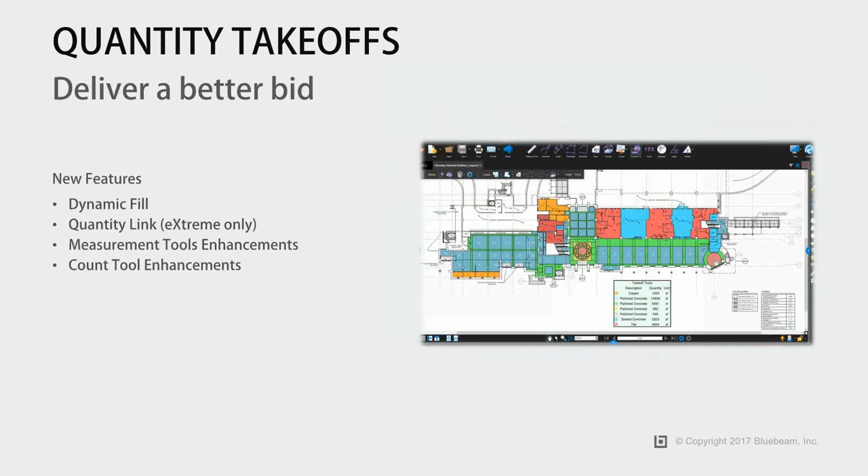As mentioned at the beginning, we've placed a lot of focus on takeoff workflows, as you saw in the new enhancements. Now let's look at other enhancements besides takeoffs we're introducing in Revu 2017. For automation, we'll introduce 2 of the most heavily requested features of all time to help customers such as yourselves: automation, form creation, and batch sign and seal.

These really help the customers get the job done faster. You'll see that on the demo. Next are the visualization tools. These tools will help customers communicate information better.

The 2 major new features in Revu 2017 are 360 photos. This feature allows users to take a 360 photo with cameras such as Samsung Gear 360 or Ricoh Theta S and embed them through capture into the PDF.

3D PDF enhancements - again, a feature your customers have been asking for. So without any further delay, let's just go straight into the demo.

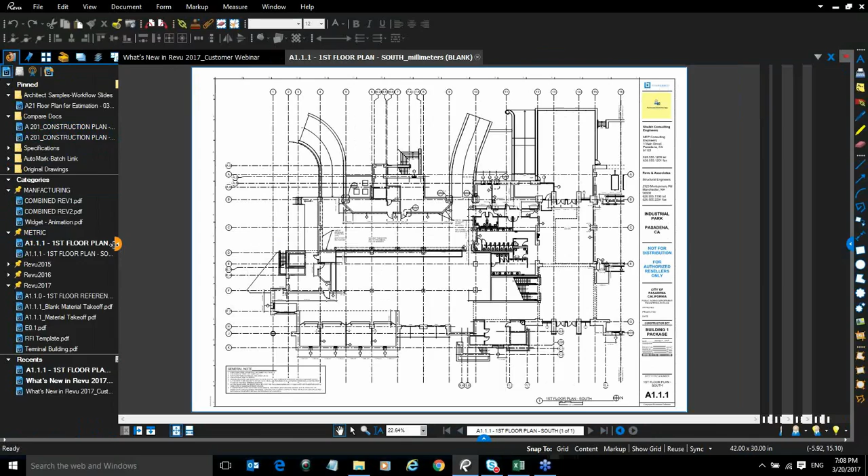Okay, so the first one is going to be the estimation, the takeoff estimation. Let's just go ahead and open a document. I have a document here. Okay, I'm going to open it up. And you can see it's a drawing, and then I have a little attachment over here.

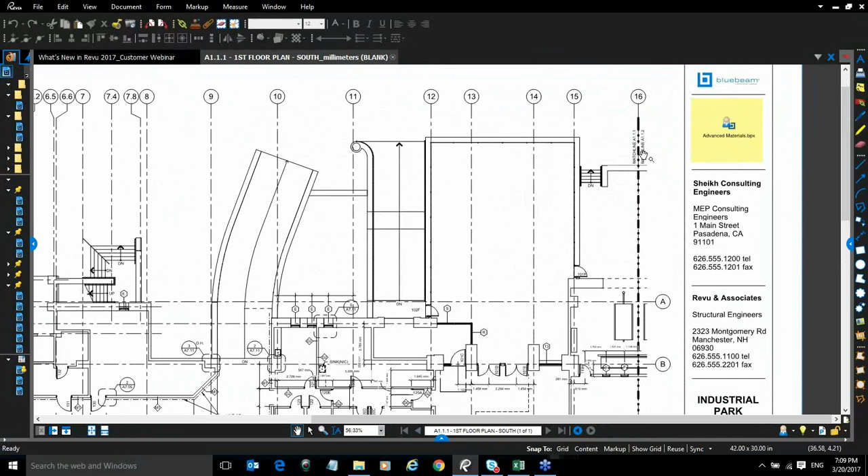So I'm just going to play a scenario of being an estimator. I'm receiving this document here, and it's good to have this profile that's attached here, an advanced material profile - this is a good way to communicate to the team. If you have a profile that you want the estimators to use, there are several ways to communicate that, but one of the best ways is to actually attach it to the document, like what you're seeing right here in this example.

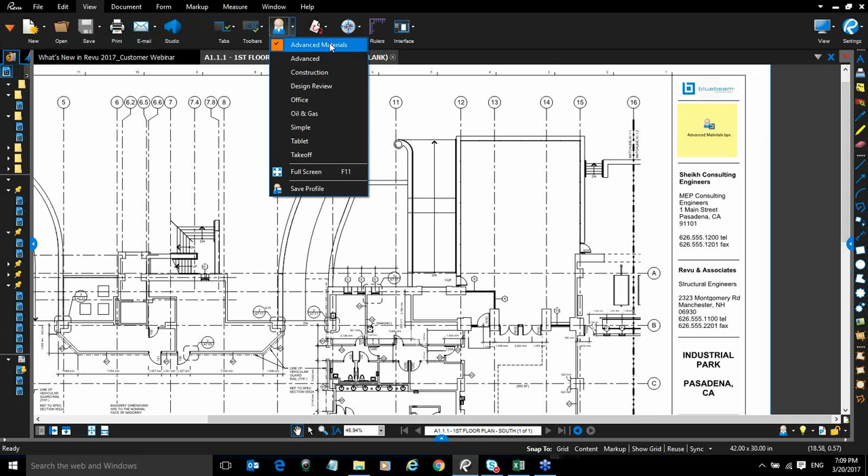All I have to do, if I'm an estimator receiving this document, is double click on this and it automatically loads in the profile. As a matter of fact, I've already done this, so I'll just show you how it looks. I have the profile here, and by double clicking this once again, I have this advanced materials loaded right here.

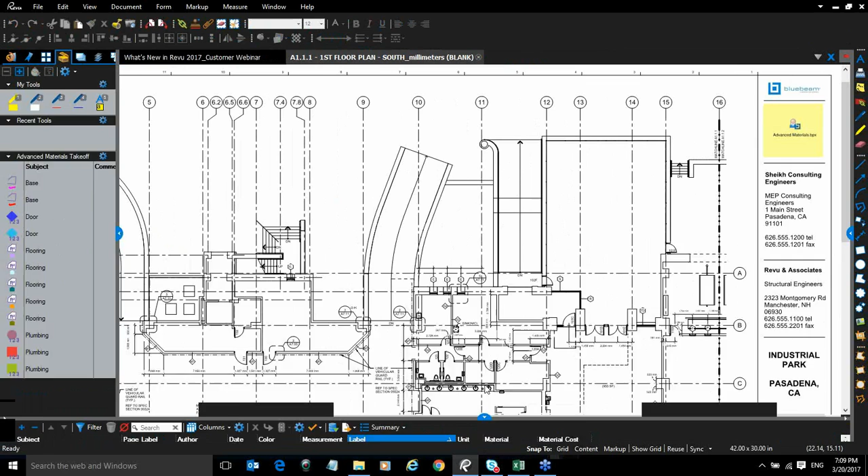So what do I have in this profile? First of all, this advanced materials includes these preset materials with these label settings and all the advanced materials - it's kind of ready to go with the setting right here. Also included in this profile - let me shorten this a little - are 2 custom columns. One is called material and the other is called material cost. These custom columns can be made straight within Revu from the section right here.

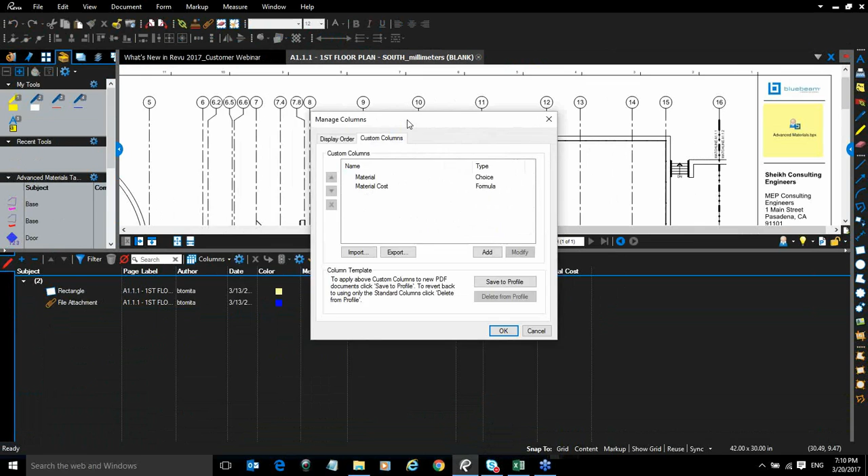I'm just going to open right here in this section, and you have the custom columns tab right here, and you'll see these 2 custom columns that were created. So let's look at each one. The first one is the material right here. As you can see, when you click on this, these are all preset - basically a combination of the material and the cost. This is in dollars, $5.50, whatever it is, all created here.

So one way to do it is to actually go one by one into this in detail and continue to enter all these items. But to be honest, that's not really intuitive enough, because usually the estimators will probably have a pre-built spreadsheet with all this information built in. So rather than spending time within Revu creating all these line items one by one, going all the way down, you can actually just import that spreadsheet straight in - load the pre-designed spreadsheet right here to save time, and you have the information that you need.

So that's the first custom column that you have. The second one is the material cost here. So let's just open and see how that looks like.

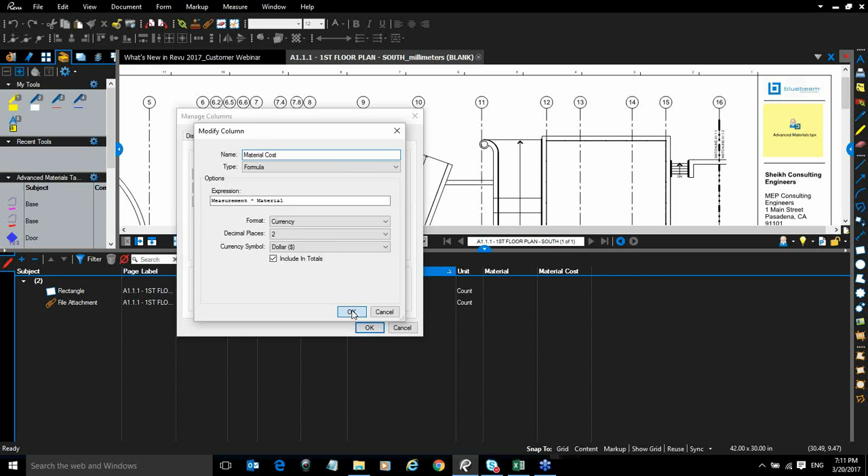This one you see is a formula type. What it does is takes the measurement that you've taken off from the diagram and multiplies it by the material cost that you just saw on the other custom columns in the material columns here, and it generates an estimate, subtotal of the estimate right there. So those are the two, the tool chest right there and the custom columns embedded in that custom profile or advanced material profile right there.

So now I have this information, I have this profile loaded. What's the next thing I do as an estimator? Well, before I start taking measurements, I want to make sure that I'm getting the correct measurements. So what that requires is a calibration, of course. Let's go ahead and do the calibration.

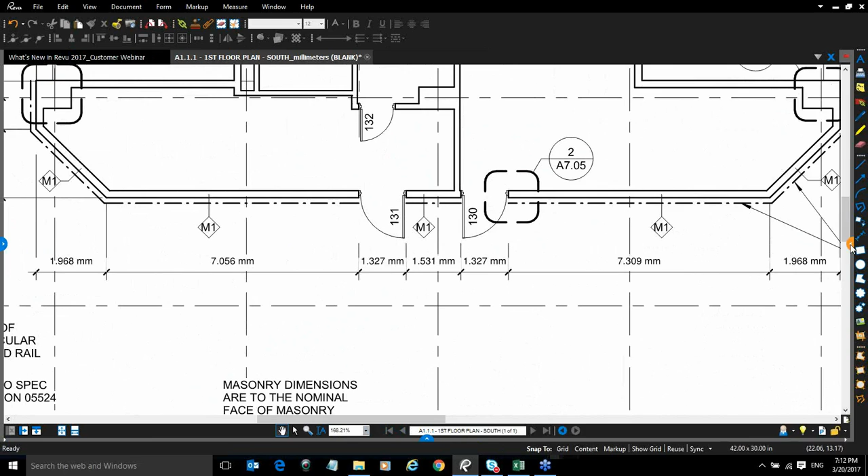Best practice is to take the longest area measurement or the longest length measurement and take the calibration from there. So I can go over here to my right panel, go to the measurement tab, and choose calibrate. I'm going to take this longest line over here.

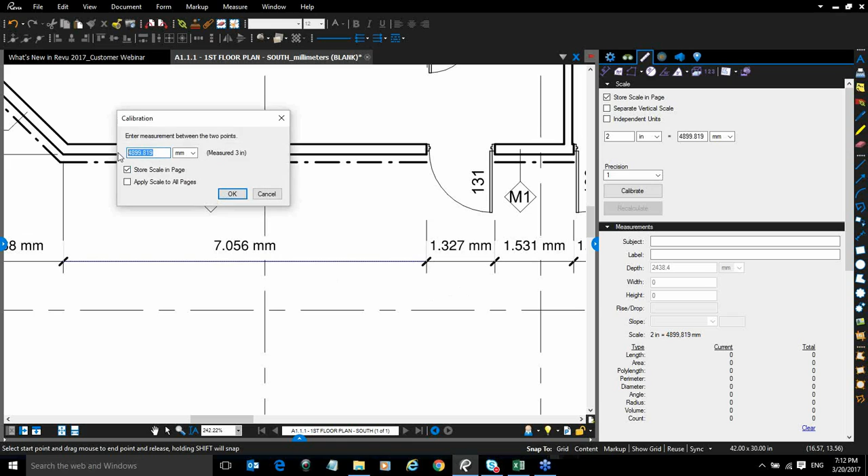And take the measurement here. Click, and I'm holding shift to draw a straight line right here, and I'm going to adjust this to what it shows. It's 7.056 millimeters. Okay, I'm going to click OK.

And once I have that takeoff, I want to make sure that it's the correct takeoff. So I'm just going to take the measurement on the second set right here to make sure that I have the correct calibration done. Oops.

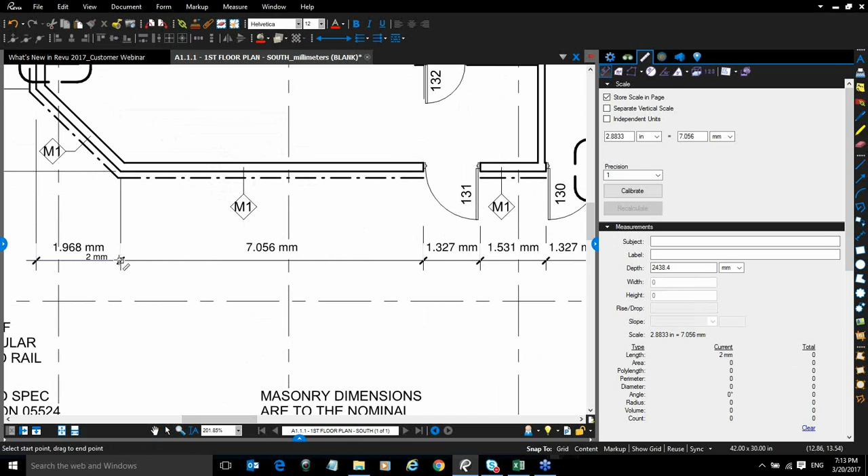Let me just go ahead and take that off. Accidentally clicked on the check. Okay, I'm going to delete that, and I'm going to take the measurement right here. And go right here, and I'm going to set the precision to 3 digits, and there you have it right there.

So now I have this. I'm going to make sure that it's correct. You can see that it's correct right here. It's a little bit off, but we'll live with it. That's fine. If you do it correctly, then it'll show the correct precision right there. I can do it again, but I don't want to waste too much time doing that for you guys.

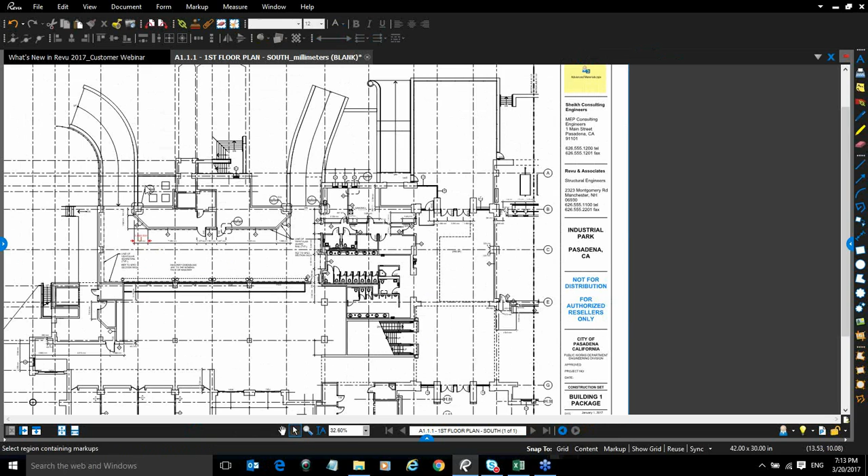So I have that over there. The next thing I want to do, this is something that, to have a quick summary as an estimator, is a convenient tool. It's strictly optional, but I want to do something called a legend. Some of you who are already familiar with Revu know legend is a functionality we introduced in Revu 2016. So that's a last year feature that we introduced, but it's a very convenient feature that I wanted to show you how it looks here.

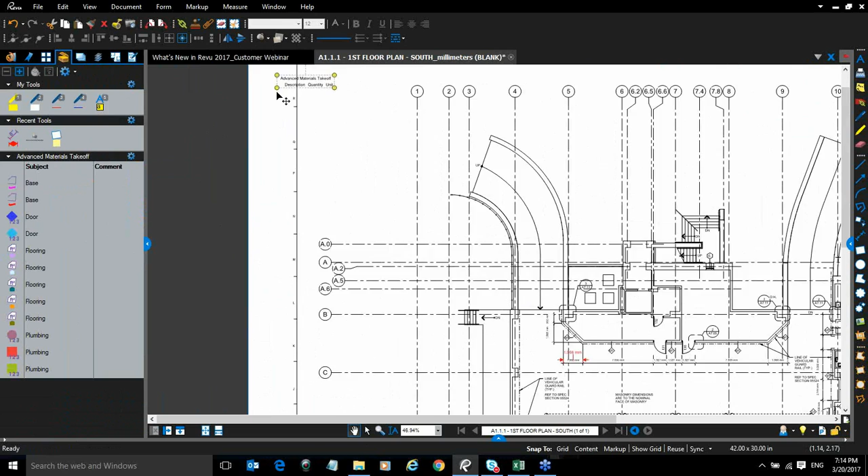So to get the legend, I click on this right here, go to properties, click legend, and create new legend. And as soon as I click that, it's already built and you can see it, and I can just paste it anywhere I want. I'm going to put it in the corner right here so it won't be too distracting. I'm just going to open it up right here.

And once I have this, okay, I'm going to change it. I'm going to add some more in here. I'm going to go to properties right here, which opens this tab, and I'm going to edit the columns right here. I'm going to add a couple more in here to make it easier to see.

I'm going to add label. Okay, I'm going to first add label, and I'm going to move this up. Okay, up over here, and I'm going to reposition it. You'll see it over here once I start doing this. I'm going to reposition it and put it right next to description. So I have the label, a label quantity, and I have a unit, and I want to add one more.

I want to add material cost. Okay, so let me go ahead and pick material cost right here, highlight it, and I'm going to move this up. And you'll see what I'm doing right here as I do this.

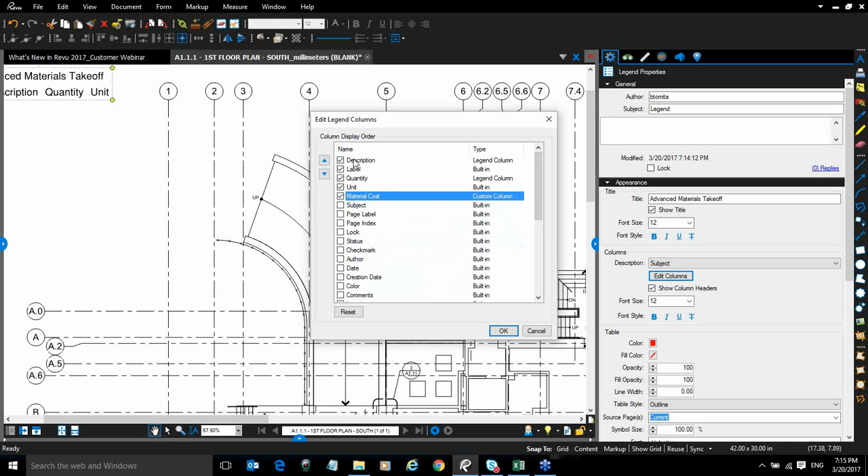Okay, so as I do this right here, I move it up here. So I have description, label, quantity, unit, material cost. I'm going to click OK. And once I click OK, you see that it's all listed over here.

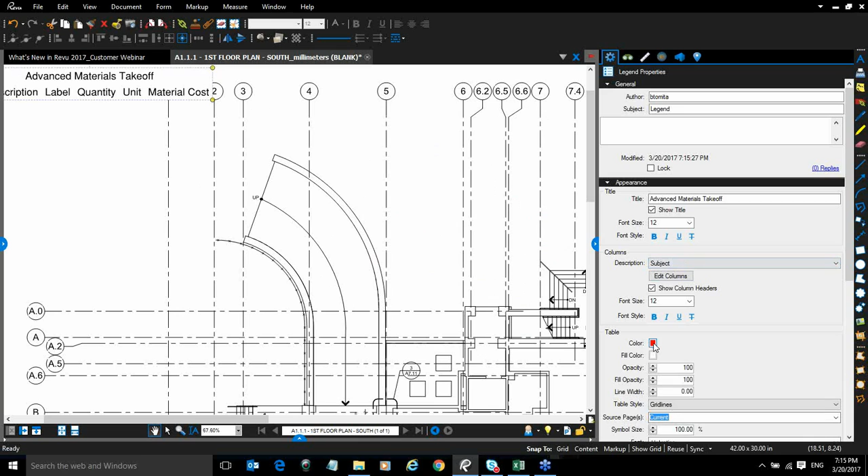Just to clean up a little bit on the view so it looks cleaner, once again this is optional. I don't want to spend too much time on a Revu 2016 feature here, but I'm just going to clean it up a little bit so it'll look nicer. I'm going to change the color to black. And there you have it right here. It looks kind of nice, right?

So I'm just going to put it right here where it's not going to be taking too much space over here. And as you can imagine, as I start taking measurements, you'll see this filling up over here. Okay, so now I got the calibration done, and I got the legend up. I'm ready to go and I'm going ahead and do a takeoff.

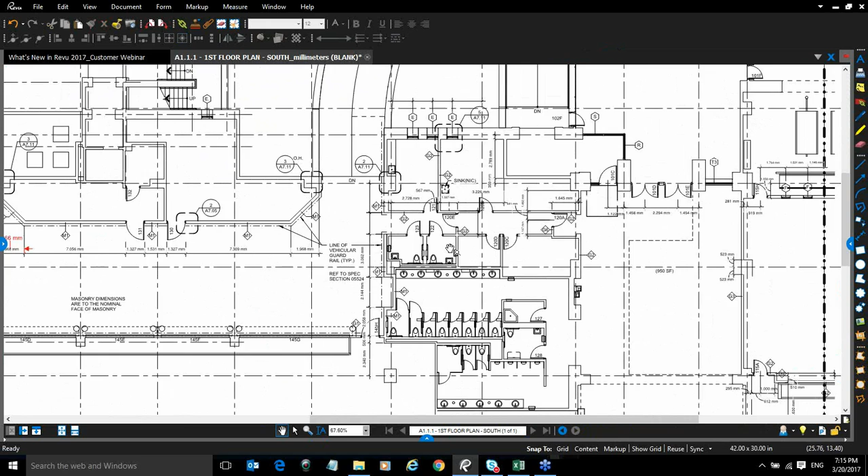First one I mentioned, it's a wow feature for Revu 2017, dynamic fill. Let me see how that looks like. Dynamic fill can be found in the measure right here, in the dynamic fill section right here. Once I click on this, you'll see a little panel open up right here, a little palette, if you will. First, I'm going to click on this little plus sign right here. This builds a boundary or wall, we call it.

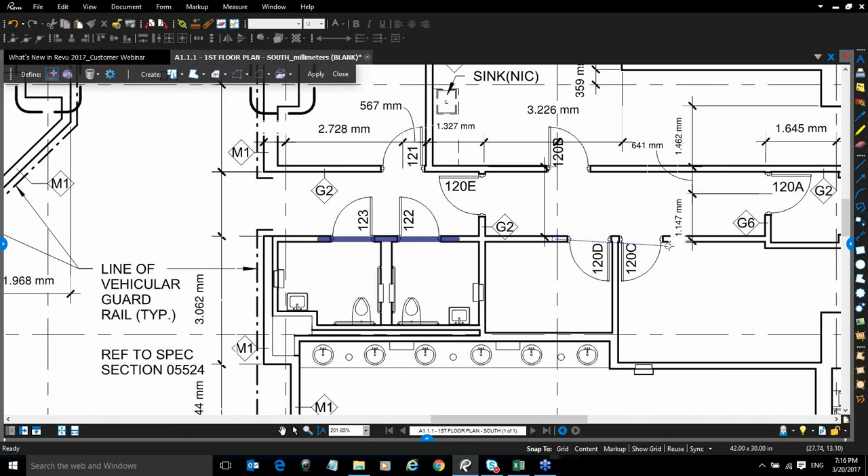And I'm just going to draw a wall over here. What I'm doing is I'm closing down all the open spaces right here. And you'll see the reason real quickly why I'm doing this. I'm just sealing all the openings right here. So I'm making an enclosure right here, right? Click and double click right here. So I build those boundaries.

Then I use the fill. So it's just like dropping a paint, and it just automatically fills like this. Just drop it, get it going, and it just fills it up. I'm just going to do one more to give you an idea.

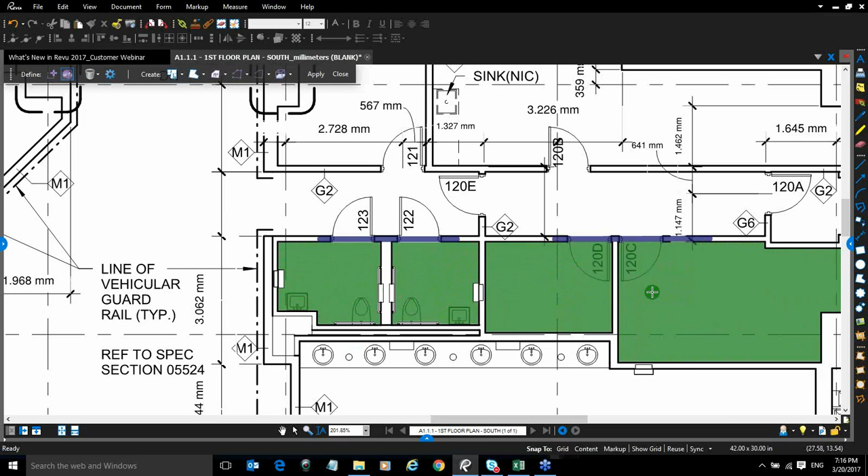So once I have this fill done, okay, then I'm already ready to make takeoffs, right? Let me do the takeoffs. I can do spaces, I can pretty much do anything I want. Let's go ahead and do the spaces right here. I can rename it if I wanted to. I can change the color, right? I'm just going to change it to purple for the sake of it, right?

And I can do polygon, but then I can do area measure. I'm just going to take the area measurement right here, and not just taking area measurement, but if you remember on my advanced material profiles, I already have labels or materials onto it. So I'm just going to go ahead and pick something. I'm going to say flooring is concrete in this case right here. So I'm going to pick this one and click on that one.

And I can add some more variety. I'm just going to add a perimeter to this. I'm just going to say tile base, add it right here, take that off. I can also do volume and all that type of stuff as well. I'm going to go ahead and apply.

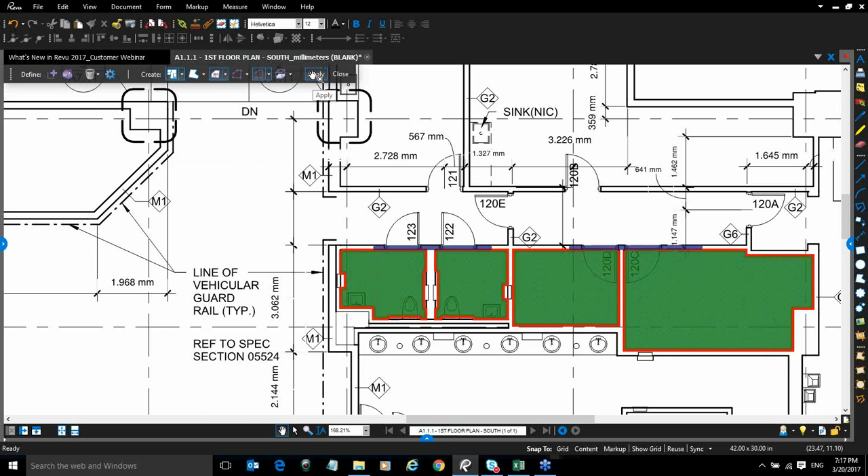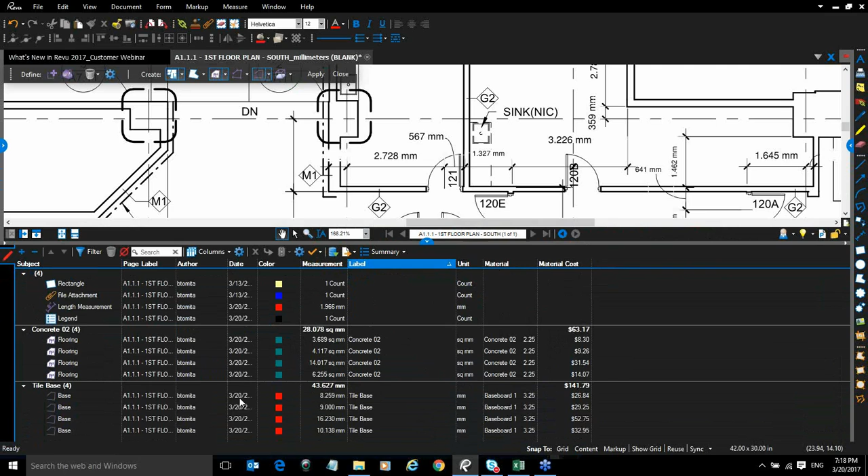As soon as I finish apply, you will see that the measurements are all taken. And not only that, if you remember I did the custom columns, the material, assigned the material and the corresponding cost to it. It just automatically does the calculations based on the formula, and gives you the estimate in a matter of seconds. I did the area measure takeoffs, and the perimeter takeoffs, and it's all showing right here, immediately. Okay, let's just see what happened here on the other section.

If you remember, I took spaces also. So I have the spaces taken right here too. In case the customers are working on something like Revit, a CAD program, then we have a functionality or option to convert Revit rooms into spaces. But then for some reason that didn't convert over, so you have to create your own space, or you prefer to create your own space.

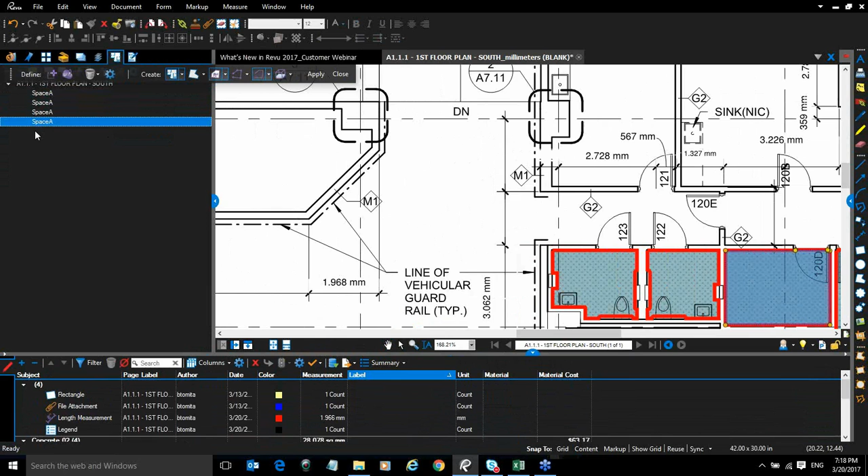You can still create spaces the old-fashioned way, one at a time, but this method is much quicker, as you can see right here. You also have the option to rename them. I just named all of them Space A for now, but you can name them anything you want. This is a much quicker process than the traditional way, and it saves a lot of time, which leads to saving money for the customer. It's the biggest wow feature for Revu 2017.

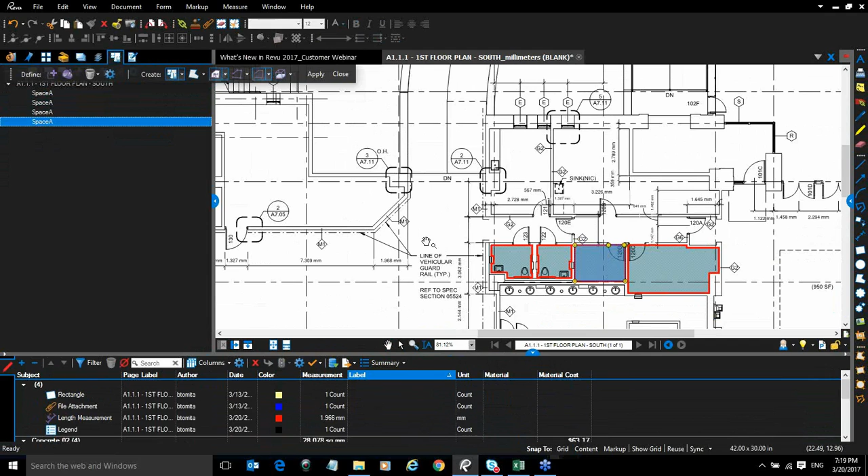In addition to performing these standard takeoffs, Revu 2017 also has tools specific to different workflows, making it much easier for different trades to complete their tasks. One of them is called the Polylength tool. Let's see how that one looks.

I'm going to take a sink right here. I have the sinks, and let's say there's a pipe running through it, because it's a sink. I want to figure out the measurement between each of these sinks, as well as the overall length of the pipe that I'm going to need.

That can be accomplished with the new feature called Polylength. Go to Measurement, and it's Polylength right here. I click on this one, then all I have to do is take the sink and click in between. I'm clicking to start and clicking between the sinks, and you can see it's starting to take measurements already.

When I get to the last one, all I do is double click on it, and it automatically calculates the measurement. It gives you the in-between measurements—sorry, it's a little hard to see—but you see the measurements and the overall measurement as well.

Since it's a sink, I have to think about a pipe that's going to run down to the floor, let's say about 10 millimeters down. In the older versions of Revu, like 2016, users had to be creative because that functionality wasn't available.

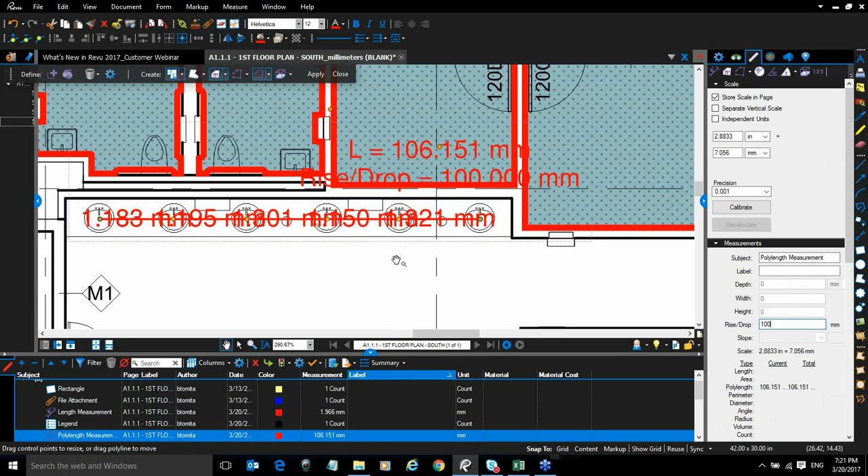Let me do this again quickly—I'll put it to zero, and it goes back here. I'll put a bigger number so it's easier to see. You can see it added 100, and it shows that 100 is the rise drop value right here. So that can now be calculated and indicated on the drawing with Revu 2017.

Another one here—I'm going to look at this ramp and take a measurement of this area. Since I have the dynamic fill now, I'm going to take advantage of that again. I don't have to build a boundary because everything is sealed, there's no opening here, so I can just go ahead and start pouring the fill.

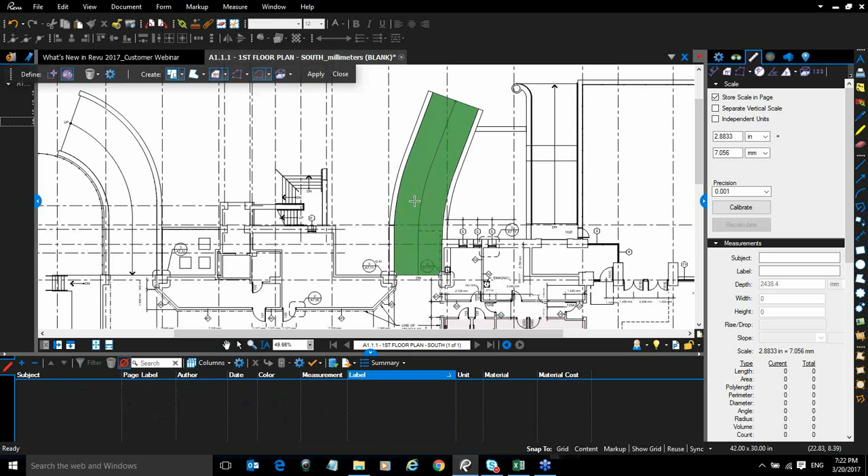I'll let it fill, and you can see it's all filling up and stopping right here. Once I'm done with that, I'm going to assign the same material, change it to 1 if I wanted to, and apply. As you can see, it automatically applied the material and calculated the area measurement right here.

Again, with the new Revu 2017 feature, you have the ability to add a rise and drop right here, okay.

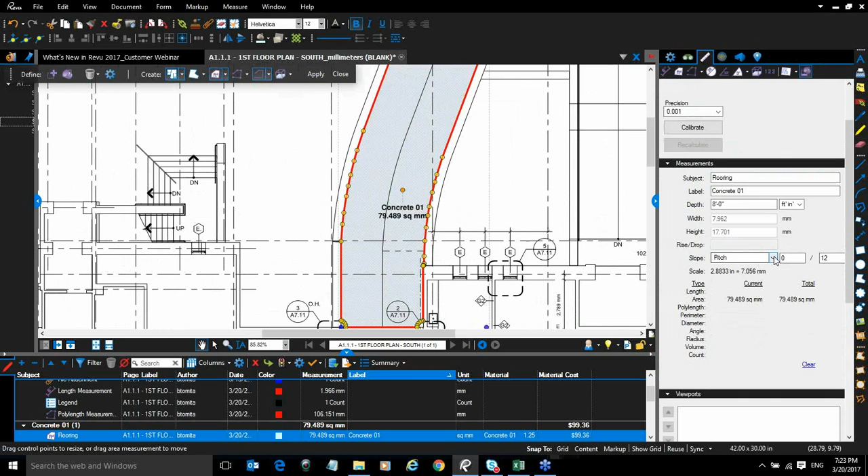So the rise and drop right here. Let's recap this rise and drop, that it can be slanted, it can be angled, right? Again, that was something users had to be creative with in the older version of Revu, and they had to do their own calculations and add some more measurements in there, and come up with their own version that they can add on to the square footage or area measurement.

But with this new Revu 2017, that can be indicated. Depending on which country you're located in, that can be expressed as either degree, grade, pitch, and what have you. So let's say I'm going to go with degree in this example. I'll say the slope is 15 degrees, and I'll add that and enter it. You can see immediately it recalculates the whole area measurement, and it indicates the slope of the degrees I've entered in this scenario.

I'm just going to go ahead and add zero again, just go back and do it real quick for you. Okay, so you have this right here, you have that indicator as well.

As far as cutouts are concerned, now you have the ability to do a cutout. Let me show you a cutout right here. The new one is the ellipse, so we have the ability to do a cutout by ellipse now. That's a new feature in Revu 2017 as well. As I'm adding all these cutouts, you can see it's adjusting the area measurement because it's taking that cutout into consideration, taking that out of the total area measurement. So that's a new feature for Revu 2017 too.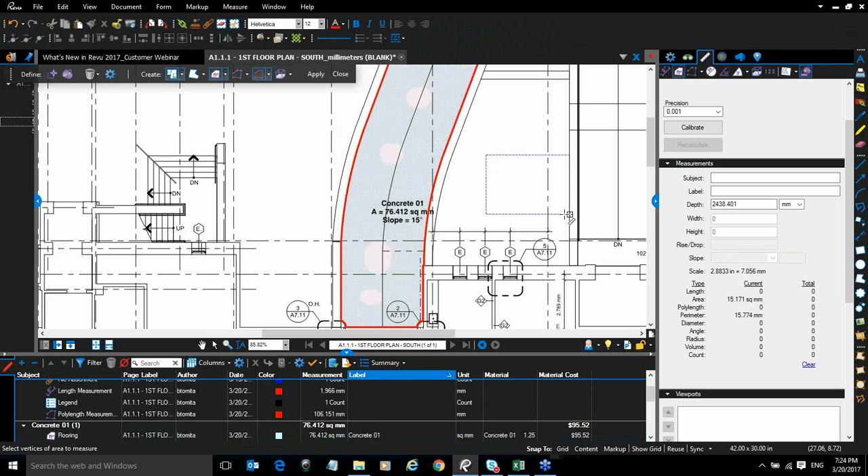Another quick one is that when you want to enter an area, let's say I'm going to enter an area just anywhere I want. I'm just going to add a rectangle right here. I have an option to actually display all the segment values right here. Immediately you can see all the segment values can be quickly displayed with this little option. Just click on that and you can indicate that. That's something a little new as well.

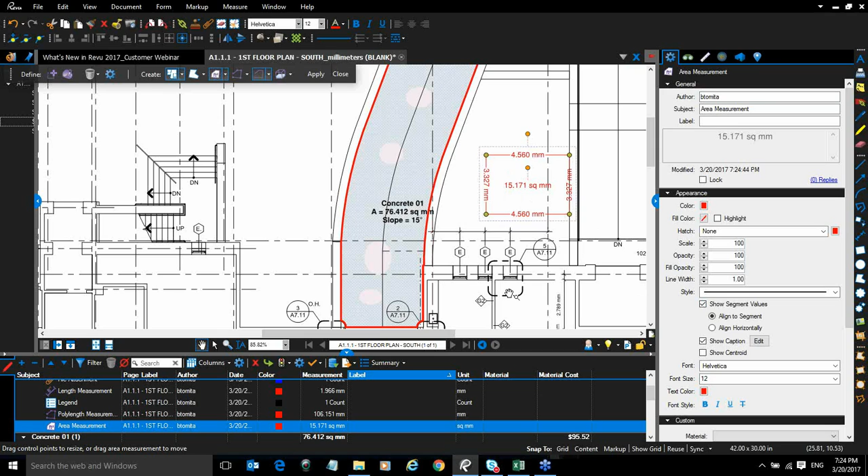Now let's talk a little bit about the count tool measurements, right? For the count tool measurements, we're introducing two types that you can count. The first one, let me just show you. I'm going to look at another sink right here. Okay, right here, and obviously I'm counting, so I'm going to try to count this - how many of these sinks are there on these drawings, right?

First, what I want to do is take a rectangle. I'm going to go over here and get the rectangle. This is for those of you who are familiar with Revu already, how it operates - you just take a rectangle, it recognizes that. I'm going to go ahead and search against that, it's a visual search, right? I'm basically searching against that shape, and it's calculating right now, and it just found 11 results right away. So there's 11 of these.

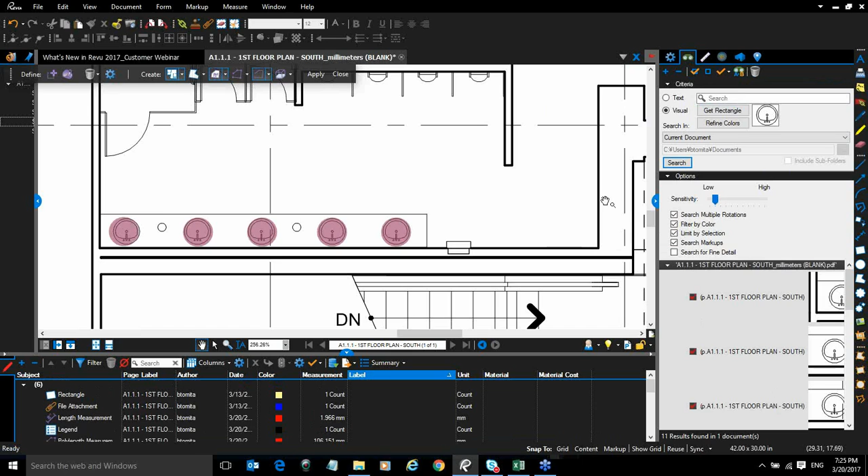What I can do is highlight them all because I'm counting them, right? And I can click on this check mark right here, and from my profile, I can assign the material right away from here. So I'm going to go ahead and select this one right here, okay? And it highlighted everything with that material. I'm going to click on that, and as you can see, it counted 11. Once again, it applied all the material costs and gave me a subtotal on the estimation for those sinks, all 11 of them, real quickly right there.

Not just counting, but it's also giving me an estimate right there on the fly, right? I can right click on this one, and I can actually do it on the drawing too, and I can also split them all. If I split them all, instead of clustering it all in 11 counts - which is still there - I can even divide them up into ones. I can split them partially, like if there's 11, I can do it like 6 and 5, or 4 and 7, or I can just split them all into one.

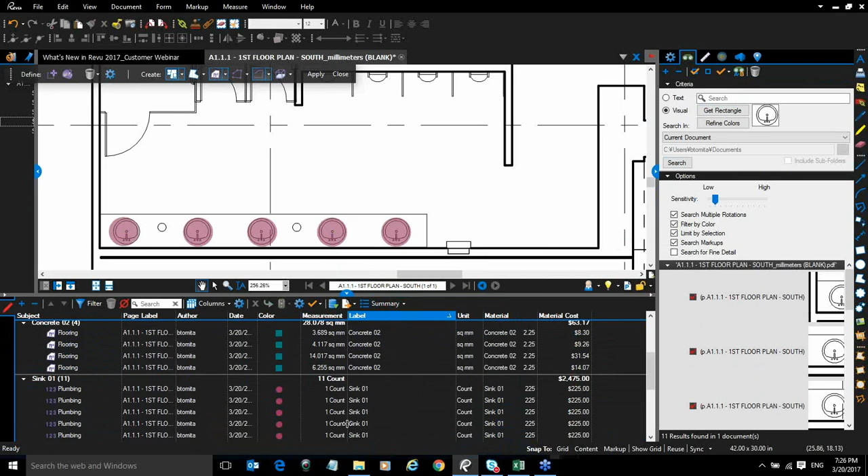So I can do split partial, or I can do split them all. So there's that option as well.

Another feature we're introducing is that you can actually use these icons or these images right here and apply that as a counting tool. So let's see how that works. Rather than explaining, let me just show you how that works.

So I want to take this design right here, and I want to use this. I want to make this into a counting tool. There's one way to do it, put check marks, like in the traditional way in Revu, it was all check marks when you're counting. But there's another option to do that in terms of using this design right here.

So what I'm going to do is I want to take this image and make a copy. In Revu, copy paste can be done by using a feature called snapshot. So I'm going to click on the snapshot, and I'm going to take this image right here. Okay, and this is a copy that I did. So obviously I'm going to go ahead and paste that. Now I have this image right here.

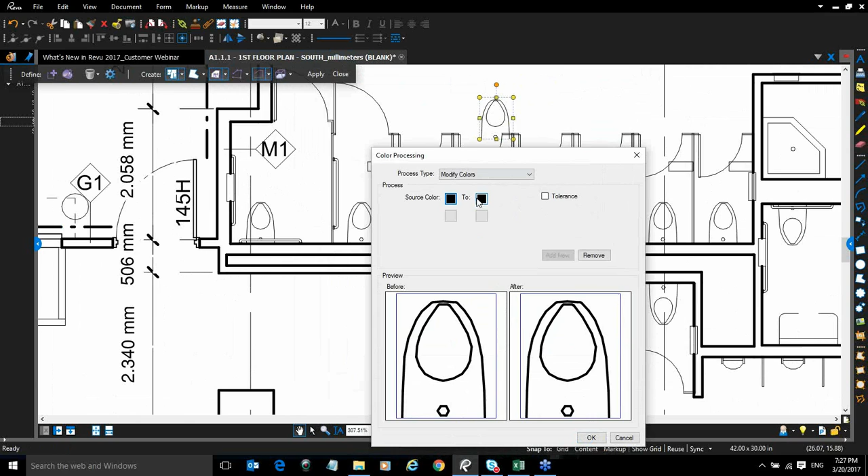To distinguish it, I'm going to change the color right here. The way it works, this is a black background, so I'm going to choose black background here, and I'm going to change this to a different color. Feel like a lime color, if you will. Go ahead and click OK. So now I have this changed color right here, and I have it highlighted.

Now with that, just a little recap, all the markups that's entered is being tracked, and it's tracked right here, the one I just created right here. I can just move this that I created into this materials takeoff section right here. So now I have the copy right here as a snapshot.

I'm going to right click on it, and I'm going to say create count. As soon as I do that, you see the same image built right here, and now it becomes a count measurement. You can see that it has a 1, 2, 3 indicator here showing that it's counting. It's a count measurement now.

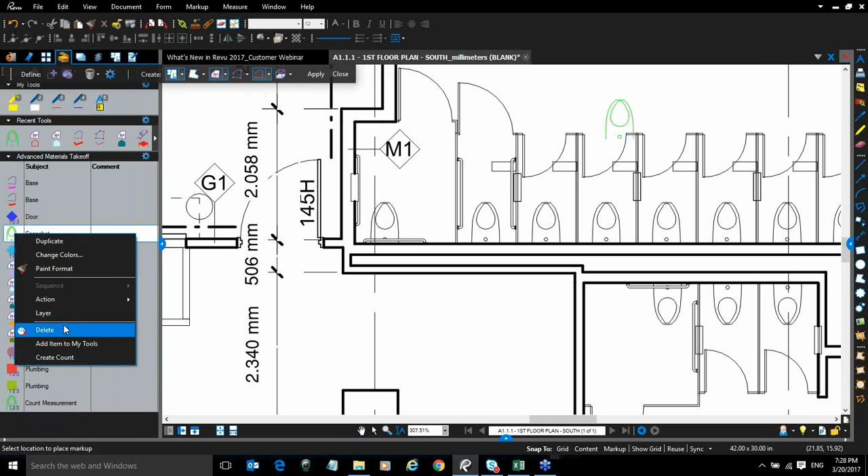So I use that icon for the count measurement. I don't need this anymore. I can leave it here if I want, but I don't need it anymore. So I'm going to go ahead and delete that. Once I create this count measurement, I can just go ahead and use that as a count measurement.

So I have these designs right here. I'm going to look at the markup list, see where it is. And you can see I clicked on 6 and I have it right here. It's all counted right here. So that's another enhancement that we made.

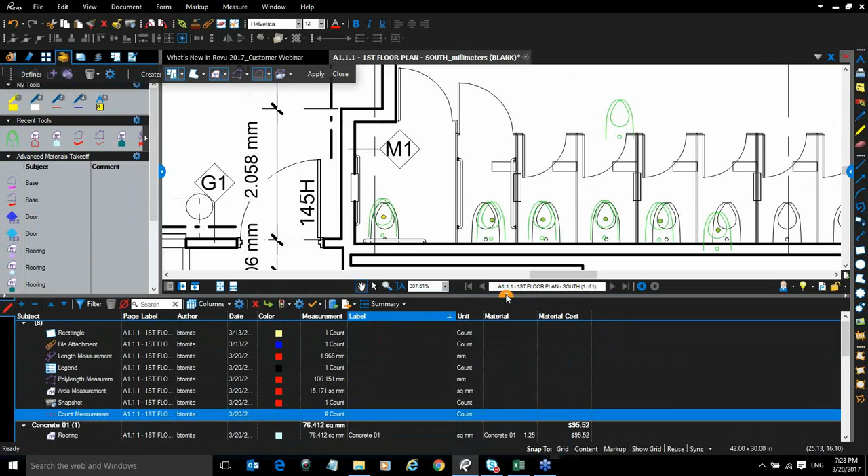You can actually use those images to make it into a count tool. Now you can see that I have all the measurement taken in here I need. Of course, in real world, if I'm an estimator, I'm going to have to do a whole bunch of them, but in this demo, I've done what I needed to do. I have all the takeoffs done. And if you remember the legend, I'm going to be showing you real quickly later, but then I have all the measurement summary over here, which is aligned with what's in here.

Basically, it's taking a summary of what's listed over here, and it's showing you a nice little summary right here. As an example, the tile base right here, you should see a tile base, quantity, and the material cost right here is showing right there. So now I have this nice setup. I have all the takeoffs done, I have a markup list, and I have a nice legend, a summary showing up on the screen.

But then the most important part for the estimators, the ones doing all the work within Revu, now they need a way to figure out how to extract this data, how to pull this data out of Revu to be able to put it on their estimation documents that they're going to use for bidding and all that. That's the most important thing to do.

So traditionally, what all the estimators have been doing when using Revu is getting all the estimates, the takeoffs, and then creating a report out of it, typically a CSV summary. They can use XML if they want, but then they export it out and figure out a way to put it into their estimation document, like an Excel spreadsheet.

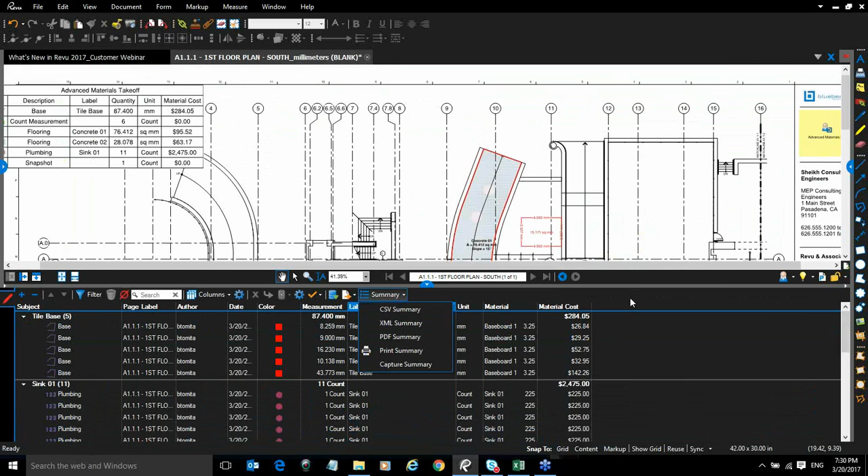Now with Revu 2017, we made that process much more intuitive. That's called the quantity link, and that's the next big wow feature for Revu 2017.

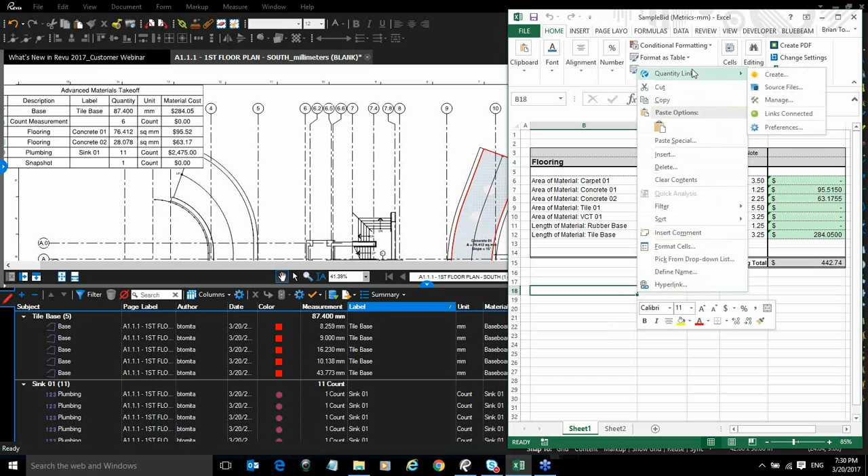So the way it works is I have this nice estimation sheet right here, and I have the documents open. The first step is I right click on my mouse and go to quantity link, and I have to check my source file. I'm going to find a document that's linked right here. I'll click OK, and as soon as I do this, you can see that numbers are starting to build right here.

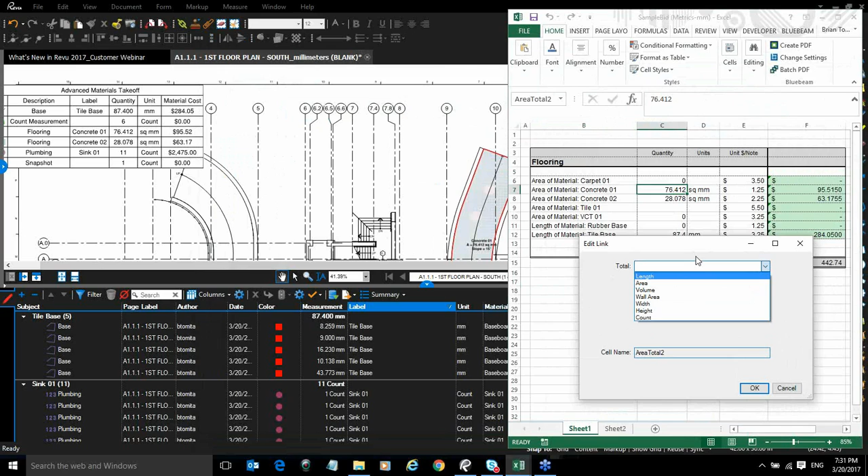The way this works is I click on the quantity in this little column, then go to quantity link and do edit. This one is showing area, so from here I can choose area. If it's showing length, I'll choose length, or any other unit I'm taking off of. In this case it's an area, and I'm going to choose a label. It says concrete 1, so I'll do concrete 1. So that's how that's being drawn, and you do this one by each column to get all the values.

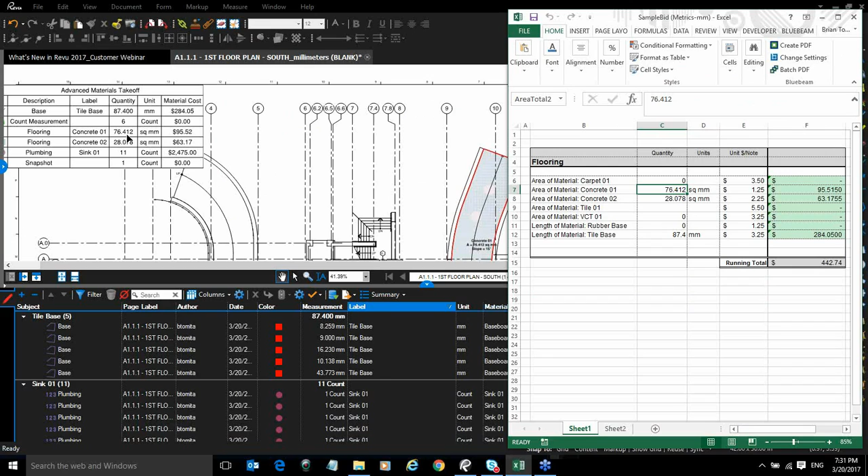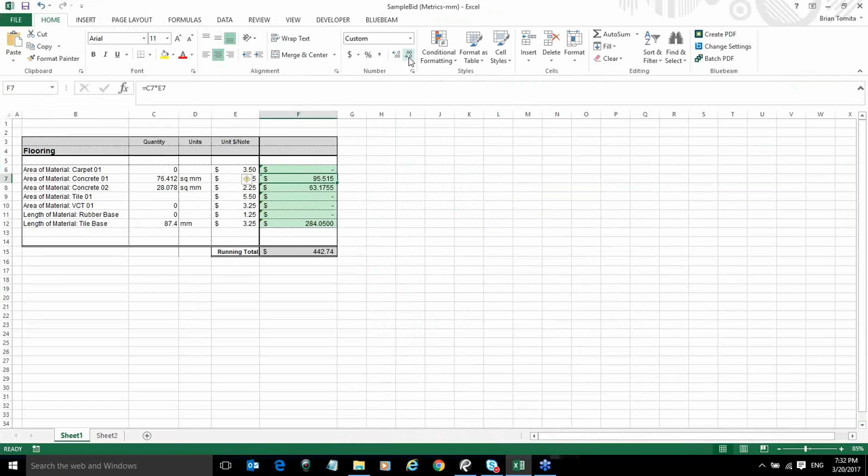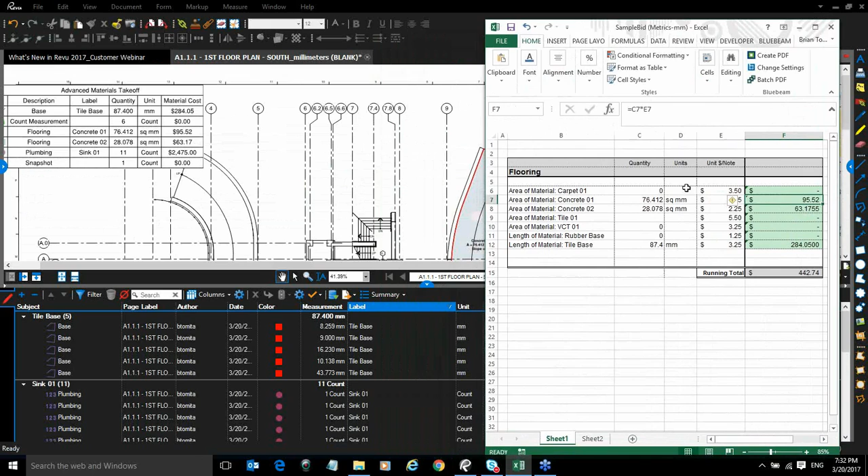So let's see if it matches. I have a concrete 01 here, the quantity is 76. The number is a little off, showing decimals that aren't two digits - it's 95.52, so if I shrink the decimals, it's going to show 95.52. I'll go ahead and take some decimals off so it's easier to see. So it matches on the numbers right there. And concrete 02 is 28.078 and 63.17 - same thing right there. So now you can see that it's linked.

So instead of going through that process of generating a report, exporting it as a CSV, and then figuring out a way to link that extracted information into this spreadsheet, now it's all linked right here.

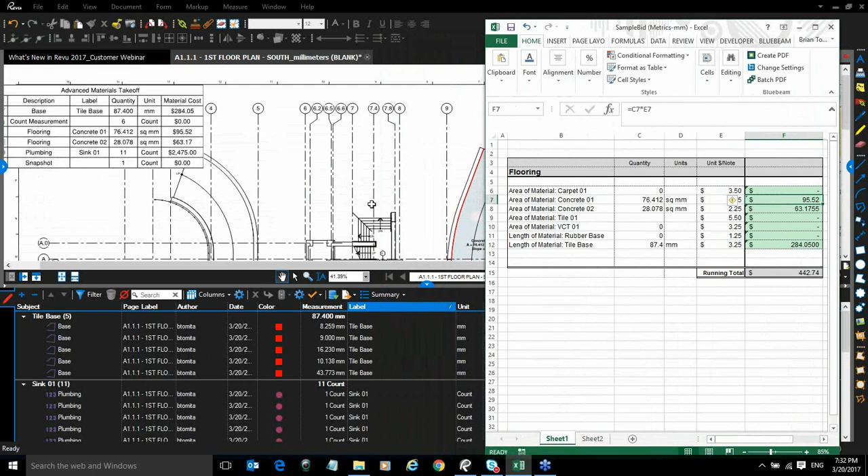Let me show you something interesting. I'm going to go to the material and choose the concrete again right here, and add this. As you can see, when I add this, the legend is dynamic - it changes the value right here. Watch more carefully, one more time. I'm going to delete this - it shows the quantity value change over here and over here. Now I'll add concrete 02 back right here, and the numbers have been updated right here.

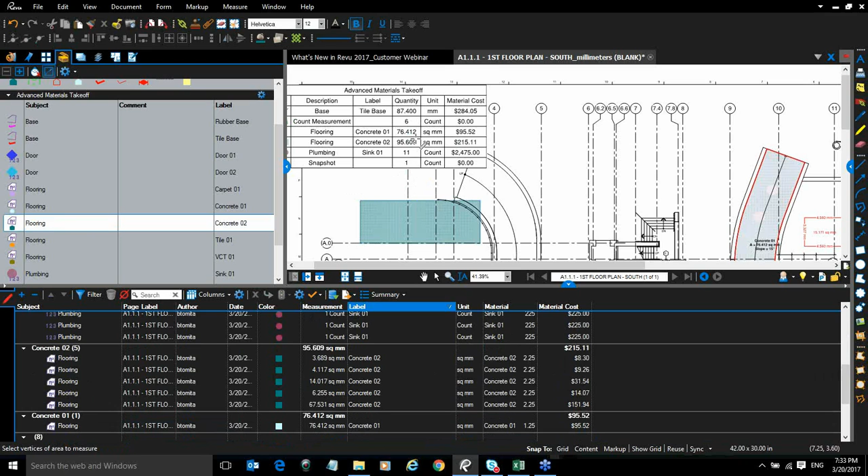So what I'm trying to say is that this link is dynamic - it's a dynamically connected link. So when you change the information on the drawing, it will reflect and update the spreadsheet. Right now it's one-way traffic, so drawing updates get reflected into Excel or the spreadsheet, but if you update anything on the spreadsheet, it will not come back onto the drawing. So it's one-way, but dynamically linked, okay?

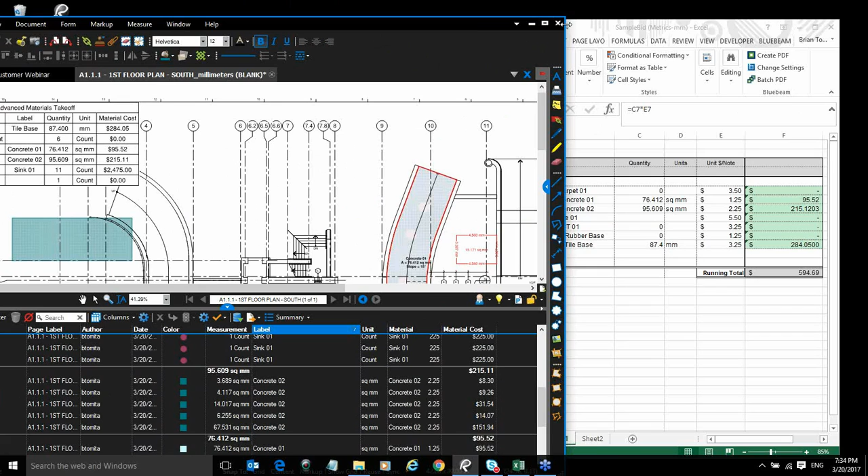Let me do something here. I'm just trying to adjust it so that it'll be a nice size right here. Okay, here we go.

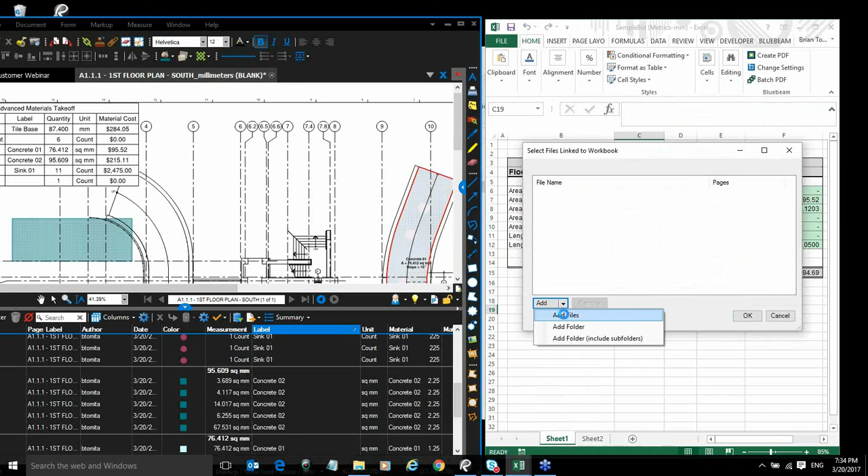So let me go ahead, as I mentioned, I was linking this to this spreadsheet. I'm going to pick on this empty cell right here, go to quantity link again, go to the source file, and take this link out. I'm going to remove that link and try to add something else, a different link right here.

I'm going to click OK. Once I do this, you see that it gets a lot busier and you have more information here. If you remember, I added, once again, I go to quantity link right now. Source file is showing as this filled document right here. So let me go ahead and open it and see how that looks.

Once I open that document, you will see right here, this one right here, that it's a lot more. You can see a lot of takeoffs have been done on this document. And if you look at this as an example, tile base, right? Tile base right here. Let me see. Yep, let me see right here, the tile base.

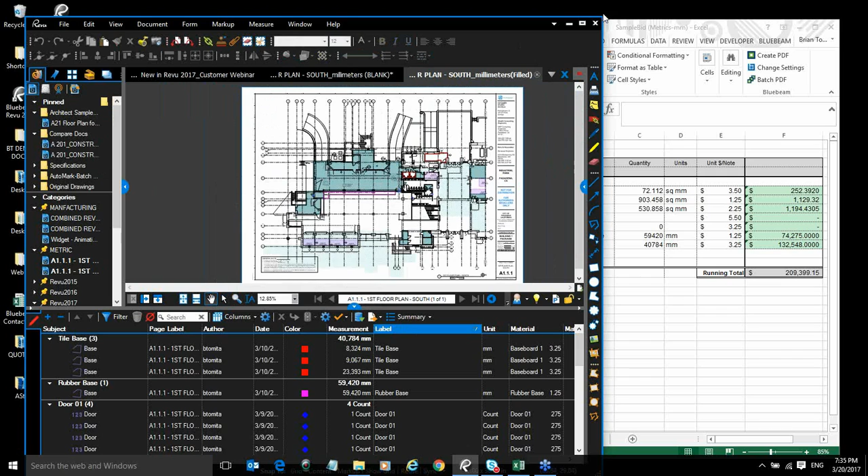If I look at the tile base right here, what's the total amount? 40784, tile base 40784, and the value is that much, 132. Let me see if I can extract that, let's see if I can show it to you. There you go. And you can see that the amount is showing right here, right? So you can see that the link is still working.

So what I'm trying to get to here is that you don't have to, every time you change your drawing, the link that you do onto a different drawing, recreate the links again one by one each of them like I was showing you. No. Once you establish a link, it will continue to work even though you switch between drawings. So it's a much quicker process to extract the data from Revu into your estimation document. A big time saver, very powerful document, powerful functionalities for Revu 2017.

Okay. Now, those are all the automation, or the workflow new functionalities that we've built into Revu 2017 for takeoffs and estimates. Right now, let's look at other automation tools.

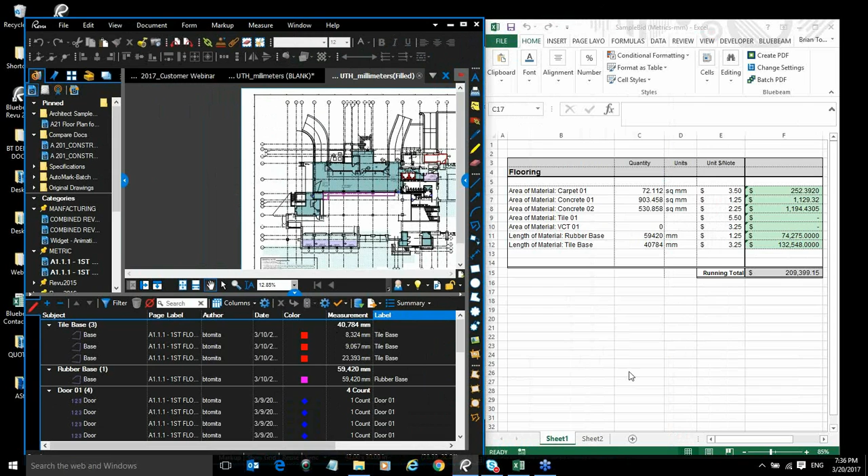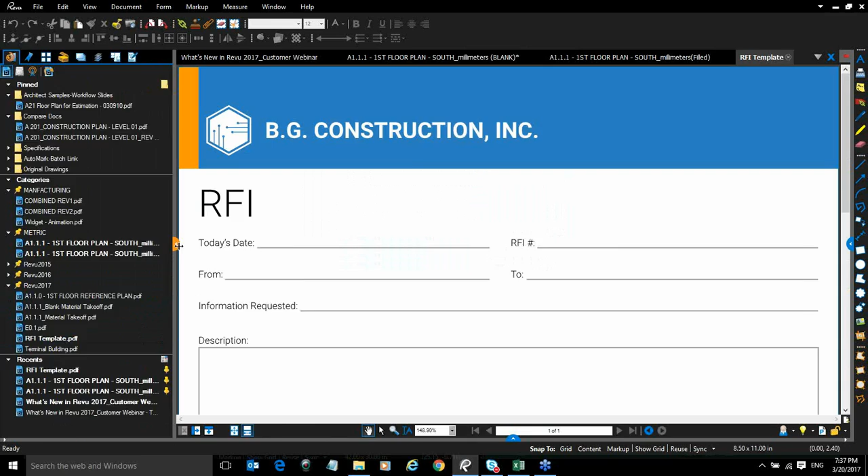The first one is the automatic form fill. Okay, so how does that work? Let me just go ahead and open up a form. All right, go ahead and open up a form, let me see here. RFI template right here. So I have this nice RFI template here, and I created this, right? A template right here. I don't have to really explain too much of this one.

I go to the document, let me see here, form, I'm sorry, form. And there's this new feature called auto create, right? So go to form, auto create, and click on that. Boom, it just creates the form just like that.

And nicely, it even captured the signature section right here, so you have all these categories right here that's being created. Those of you who are familiar with forms creation, PDF form creation, traditionally this had to be created one by one. Now, as you can see, in a matter of seconds, everything is created. So everything is automated. This was actually one of the biggest, one of the highest, highly requested features of all time, to have this automated. And now we are finally introducing it with the release of Revu 2017.

Right, the next one is batch, sign, and seal. How does that work? So I'm going to go to File, and I'm going to go to Batch, and I'm going to go ahead and do a sign and seal. This is a new feature added right here.

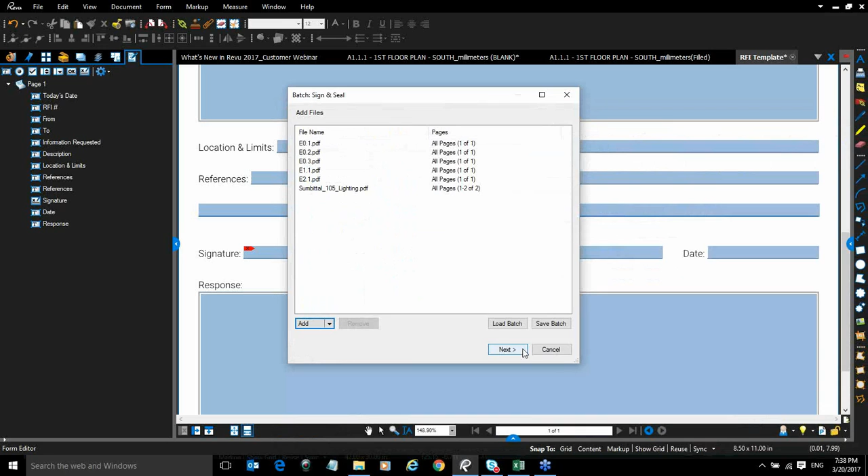Go ahead and double click on that one, and I'm going to add all the files that I want to add on that one. So I'm going to go ahead and choose my sample documents here. Okay, batch and sign and seal, and I got all the documents here. I'm going to choose everything and click Open. Next, and once I load all that information up, then I'm going to see those documents with the menus over here.

There's a signature here, sign and seal, right? So the first one is to do a signature. The assumption is that by the time you get at this stage, you already have your digital signature account. In this case, as an example, I'm going to use mine.

Digital signature, I have my own, and I'm going to enter my password to access it. Once I have this, it's listed right here. For those familiar with digital signatures, I have an option to add this. I reviewed this document, and I can add a date if I wanted, and I have this nice and ready to go signature right here. Let me load it up a little bit.

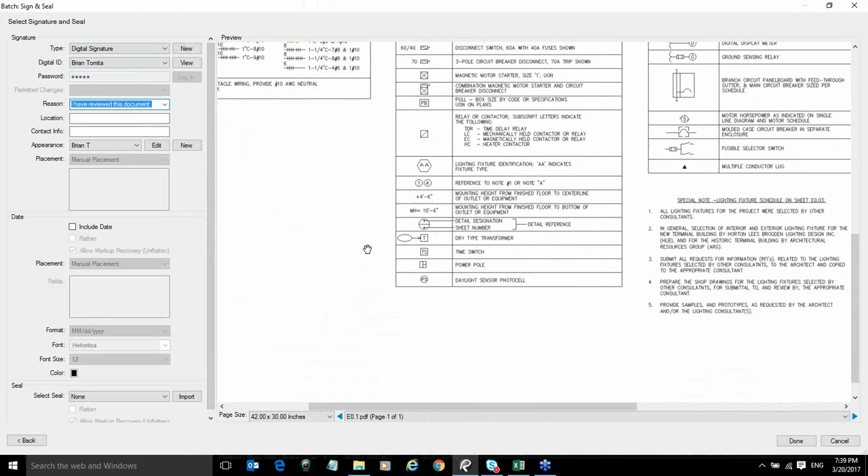Once I have the signature, I want to position it into the document. So I'm going to resize it a little bit because I want to position it in a nice area here, make it a little smaller. Move it over here, enlarging it, or made it even smaller. There you go, and I'm going to put it right here. I want my signature to come right here.

Same thing with the seal too. First, if you don't have anything, you can import a custom designed seal for the company, or use a sample one. I happen to have a sample one, so as soon as I click on that, you're seeing it right here already. I can go ahead and resize this again. It's just a matter of resizing it because I want to put it in the right position and move it into position right here.

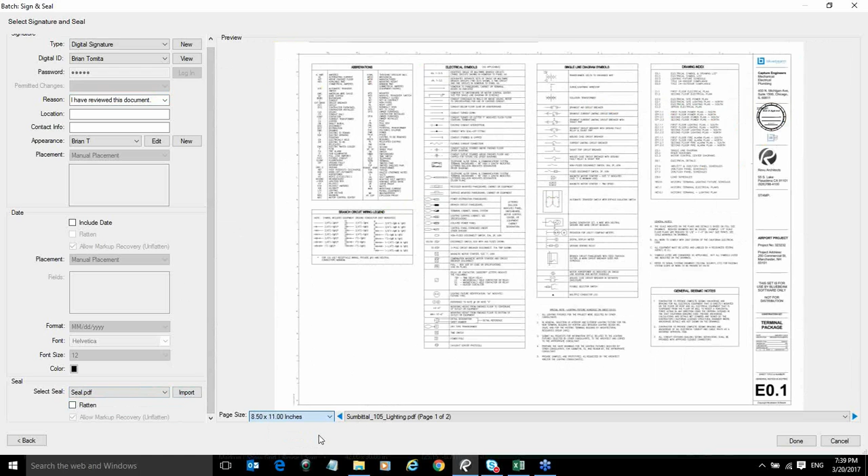I have that template, and let's look at a different size. I have it already right here. I'm just going to change it a little bit, or maybe keep it the way it is. It's too big, I'm going to make it look nicer for the sake of it. Okay, there you go, and I have my signature right here. I'm just going to put it somewhere like this. Once I go through all that in the design, I'm just going to go ahead and click done.

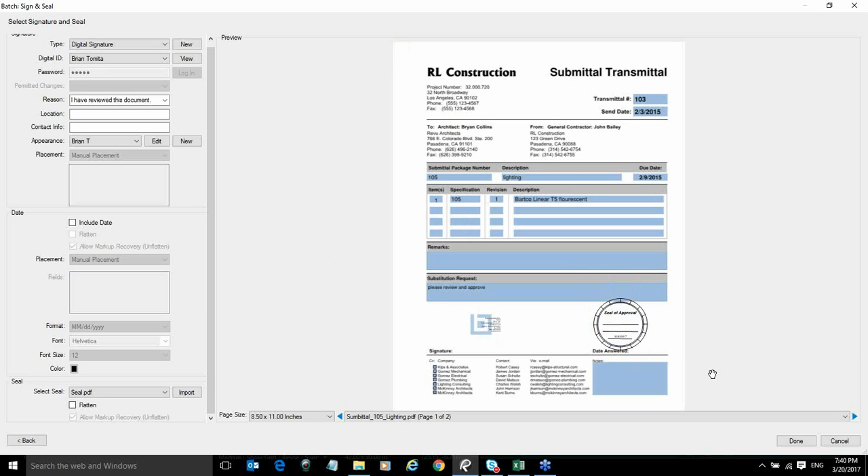Revu calculates immediately right there, and it basically puts them all in. Let's see how it looks like. It's nice and done, right here. I just put it right here. It's kind of ugly, but I did it right there.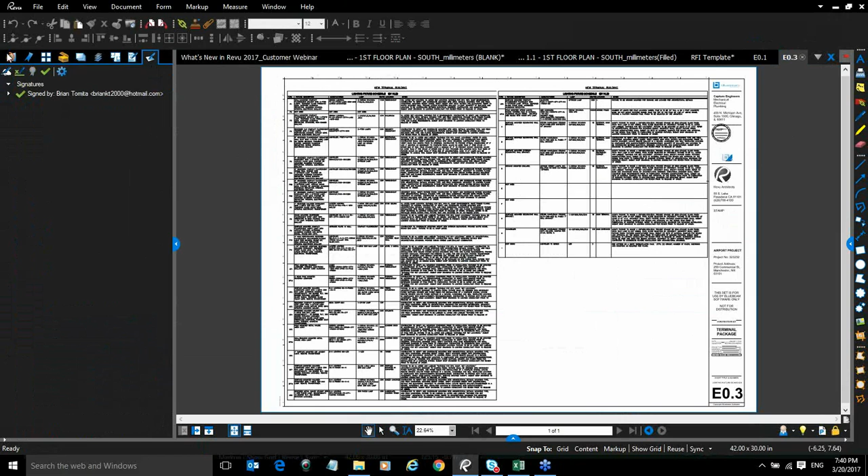Let me see how the other ones look like, I'm going to open a couple more. Yep, this one has it right here. That little warning is telling you that there's a signature, and it wants to open a different signature box right there - that's what it's basically telling you, but it's nicely done over here. Let me just open one more with a different design to show you an idea. Okay, and this one is showing it right here as I intended.

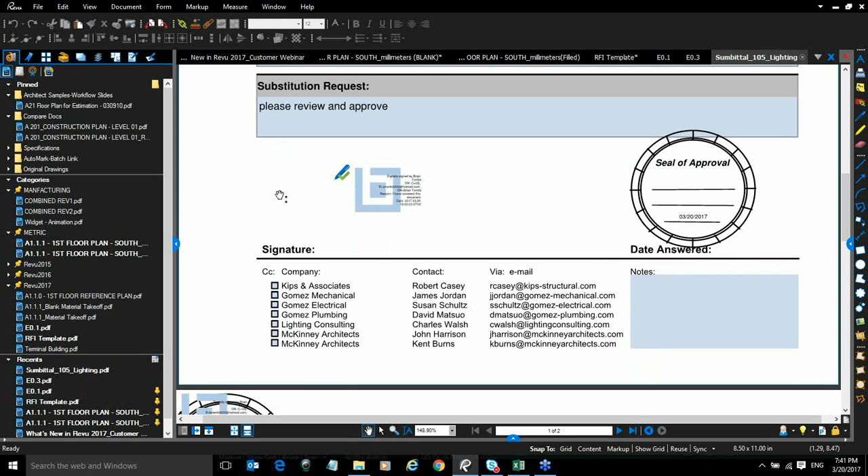As you can imagine, by the time you do the estimation, this requirement for these documents to have sign and seals entered can amount to anywhere from the hundreds to thousands, right? 500, what have you, thousands, what have you. So this batch process, once again, will help the customer save substantial amount of time and money by having this done automatically in this batch process.

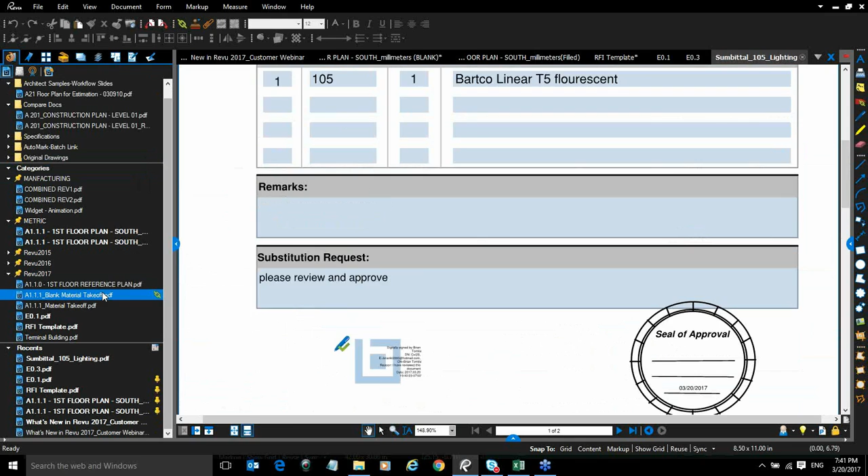Okay, now next is the visualization tool. Let's look at the photo, okay, photo enhancement. So I'm going to open this one, this drawing right here this time. And if you look at this drawing, I'm just going to close this off to give you more space.

You'll see that there's a capture that's attached. The capture, just a little recap, is a collage of photos, basically photos and video clips that you can add into a markup. So you enter a markup, which is this one right here, and you can actually right click and add this capture right here.

The advantage of capture is that instead of lining up, say you have 50 photos you want to list, you could do it one by one and list them all over here, but then you're wasting your precious real estate space. That's why we created something called a capture, so you can collect that information and put it all in here.

In this enhancement, I'll talk about the 360-degree photo enhancement. As you can see, this one is a 360 photo, indicated right here, and you can move it around. You can see it's a 360 image, and you can actually zoom in and zoom out, all the way out, and move around just like what a 360 photo image would do.

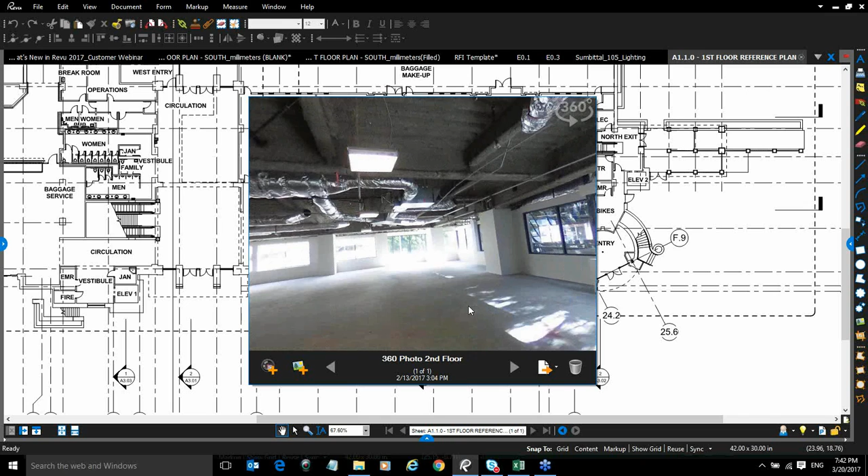This gives the user the ability to communicate more detailed information by entering a markup, and adding this will give a better visualization of what you're trying to explain. So now you have this new feature enhancement to add this.

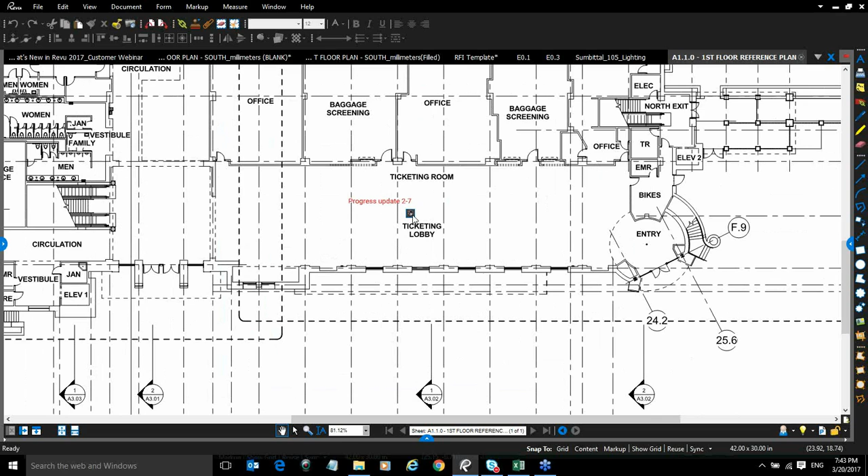Just one note about the capture - for some of you this will be a recap. The capture is basically a Bluebeam-only functionality. What does that mean? In technical terms, it's not an ISO standard feature. So within Revu, everybody using Revu or Bluebeam products like Vu can get a drawing sent to them and open it up, and just like I did, you can see these captures. However, if you try to open this in a different PDF viewer outside of Bluebeam, it likely will not work - they won't be able to see it on non-Bluebeam PDF viewers because it's not an ISO standard feature. It's important to remember. But the 360-degree photo capability is there with Revu 2017.

Now the next one is the 3D PDF enhancements, so let's look at that too. I'm going to go ahead and close this one, and there's a couple more here to get more space. I'm going to go ahead and open a 3D image.

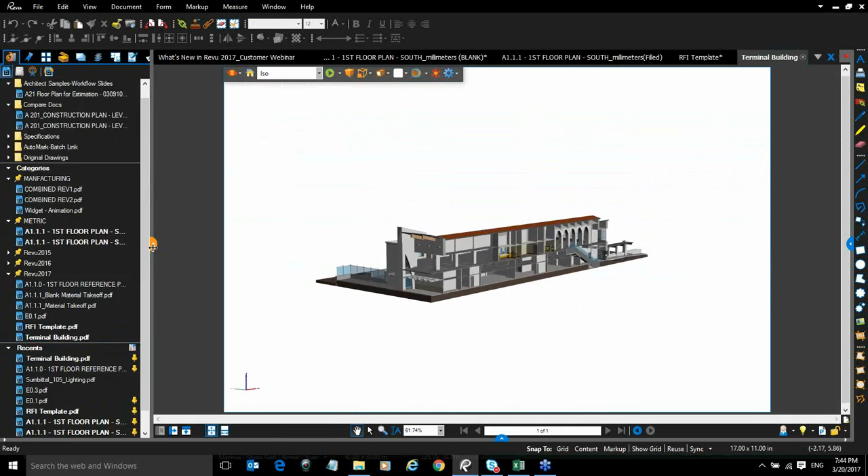Loading up this document here. Now you have it right here, so you have this nice 3D functionality here. So what are the enhancements that we added?

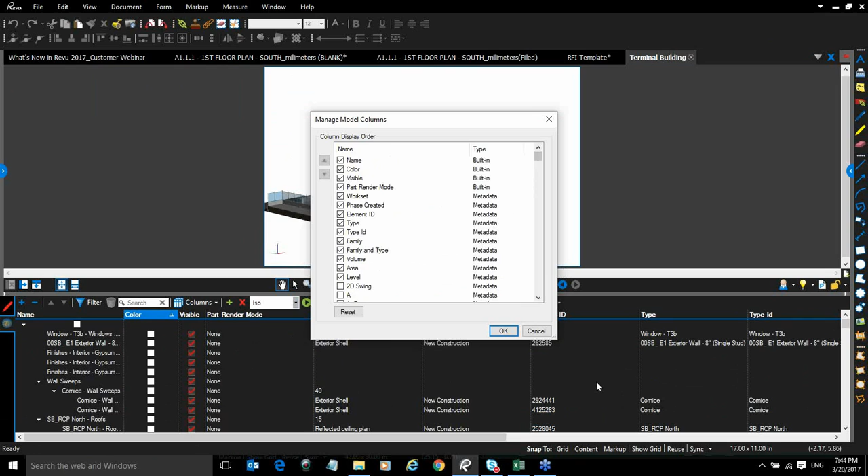First, if I go over here, I can open a 3D model tree, just like in the markup list - I have all the metadata here. Let me see what I have: everything that's converted when converting a 3D drawing into a PDF. I go to column and I can see all the captured information that's available. I'm only showing some that are clicked, but all these are selectable as much as you want - all this information is captured.

And the great news is that if you prefer, you can check on everything - not just list it here, but actually extract it into a CSV file and pull it out from Revu for your different purposes. So that's one advantage you have here.

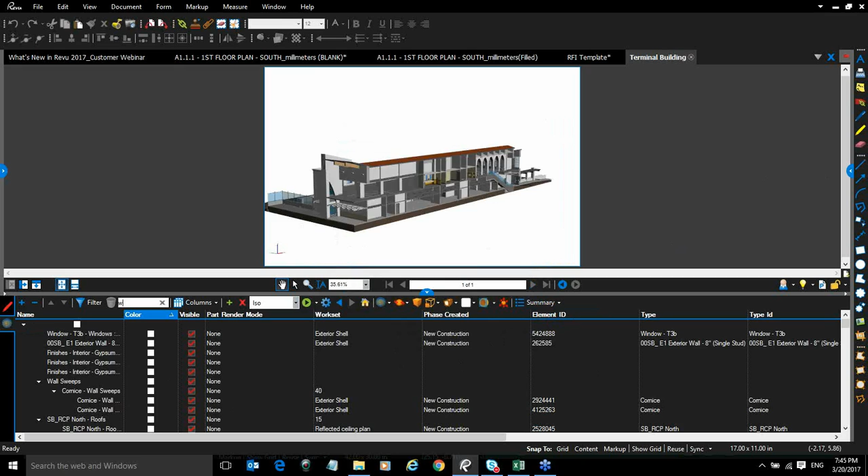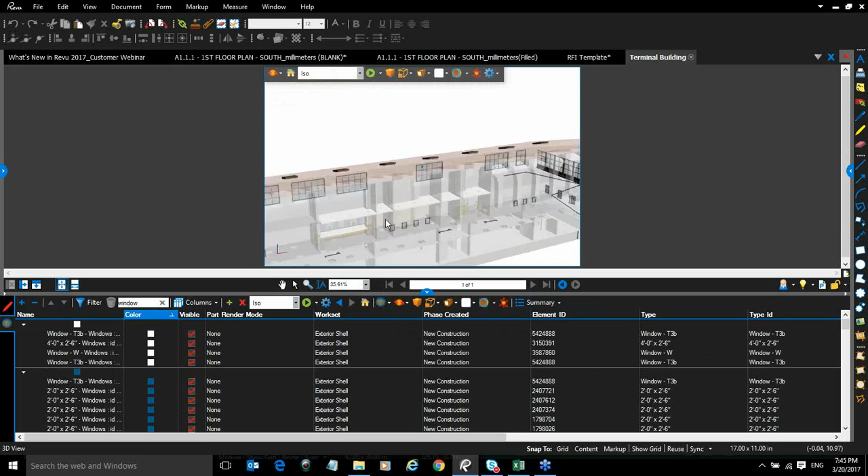Another one - I have a little search capability here. Let's say I search for Windows right here. Once I hit Windows, you can see the image became a little transparent with the highlight on Windows. This is a new feature we created: whatever you want to select on the items, it just focuses on that one to give you a better view and makes the rest of the image transparent, giving you an easier view of what you're looking at. So that's another enhancement right here.

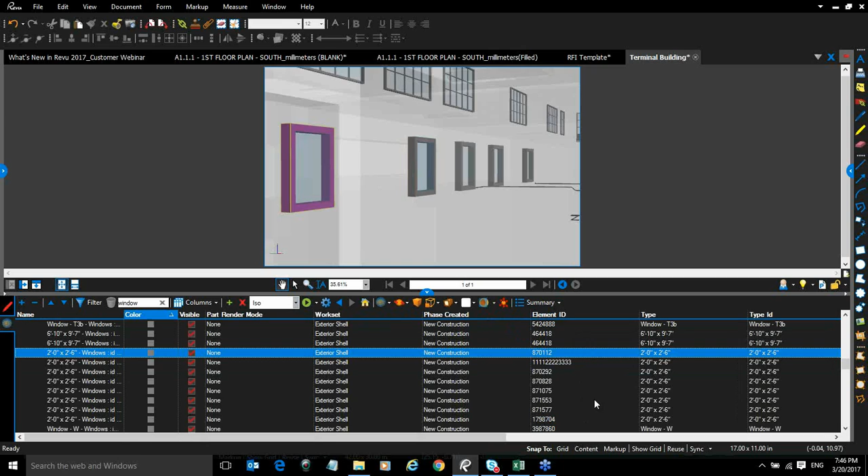The third one: let's say I'm looking at the details here in the 3D model tree, and I notice this element ID - I want to put a different one, or it's different. I can actually change this element information here and save it, and once again export it into a report. So I have the ability to adjust, correct, and make edits to the element ID and other information loaded on the 3D model tree directly in the PDF.

So that's a new feature that we have here. Okay, finally, one more enhancement we have is right here. Okay, real quick one. I have a sync right here. Trying to zoom into right here. Let's say I focused right here.

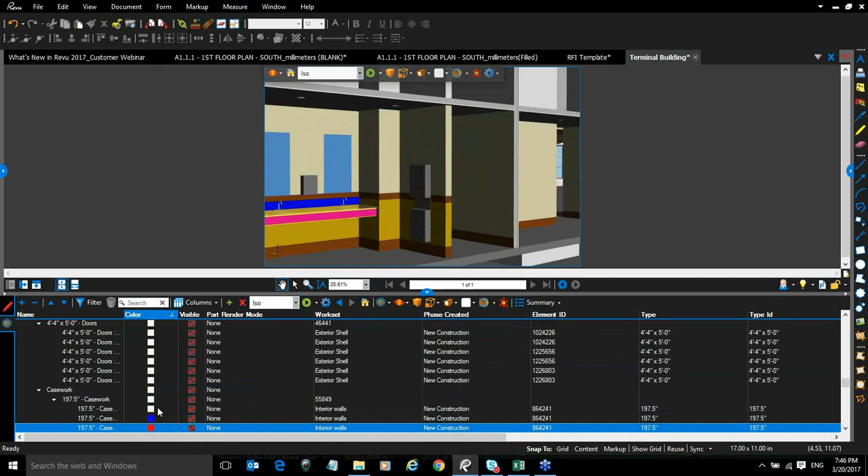I can actually change colors here. I'm just gonna go ahead and change one. I'm gonna pick another one right here, and that one is this one right here. I'm gonna go ahead and change that to red. Weird combination, but it works, right?

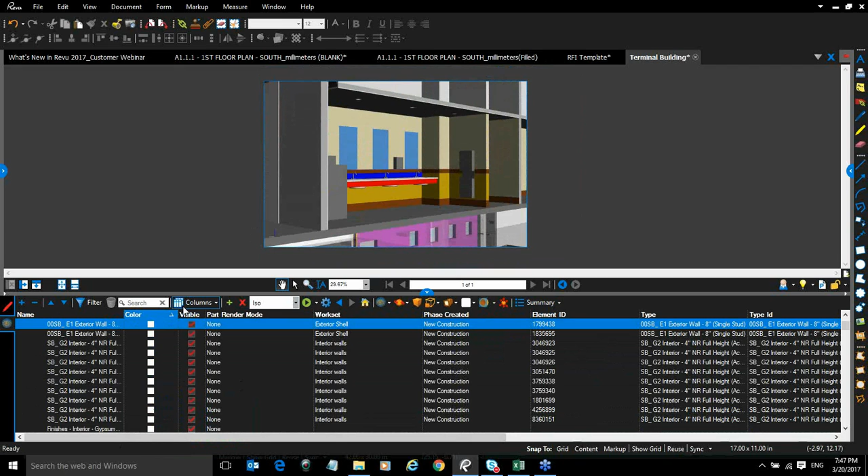So as soon as I do that, let me see if I can, yep, right here, as you can see, the colors have changed, right? Colors have changed. So I have the ability to change colors directly into the PDF 3D drawings right there. So those are the new enhancements that we have added on with the introduction of Revu 2017.